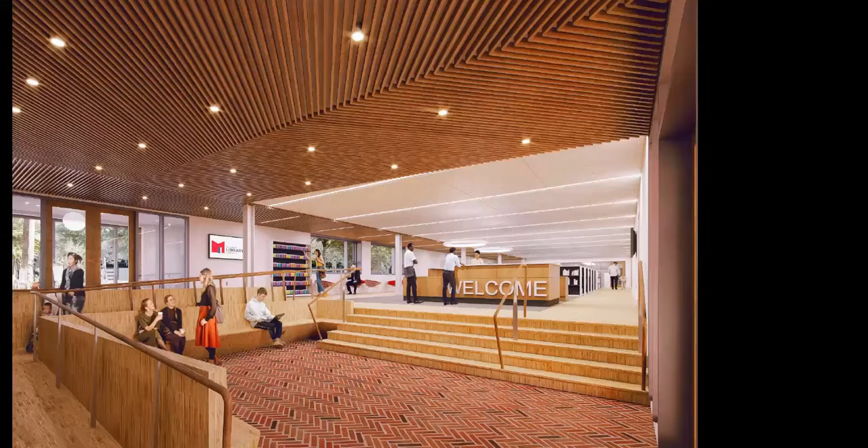So welcome to the library. This is the inner lobby with a view towards the circulation and the staff desk. We're very excited to be here and thank you very much.

As Sarah mentioned, and I won't read the list again, we really could not be here without the help of everybody on this list, from the building committee through Epic Management. We've worked tirelessly with everybody, or they've worked tirelessly with us to make this happen, as well as meeting with all the civic groups throughout this process.

We've learned a lot about Maplewood. People have been extremely generous with their time. One thing not on the list is the focus groups we've done with the teens and the kids, which has been really fun, and some of the seniors. It's been a really enjoyable process and we're anxious to get going into construction.

So to recap a little of what Sarah said, the process started a long time ago in 2010. We joined in 2016 and we've worked with the library and the township through the bond issue and COVID. It's been a long couple of years for all of us.

And we're very excited that we're now in 2022 and we're about to bid the project and open it in 2024. So with that said, a little history.

I just want to remind you, some of you may have seen this slide, some of you may know this by heart. There's the existing library under construction on the right in the green circle. This is obviously a hard hat tour from then. That's the original entrance with the stacks on the left. And there it is again in the top in 1956. But in '69,

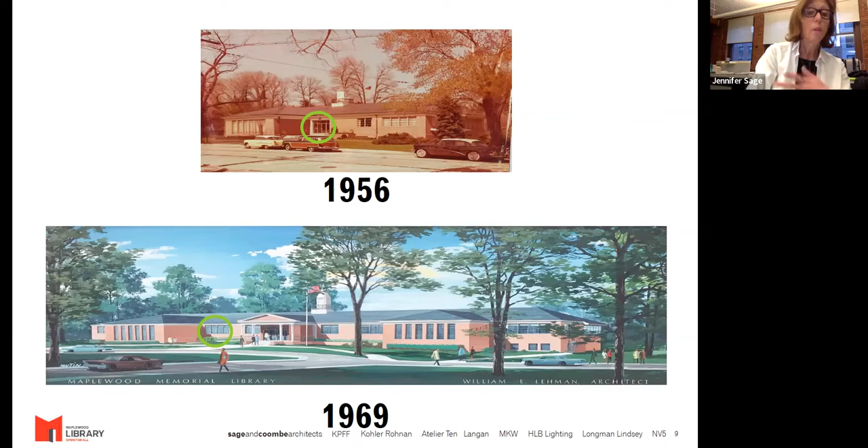Oops. Oh my gosh. Oh, sorry.

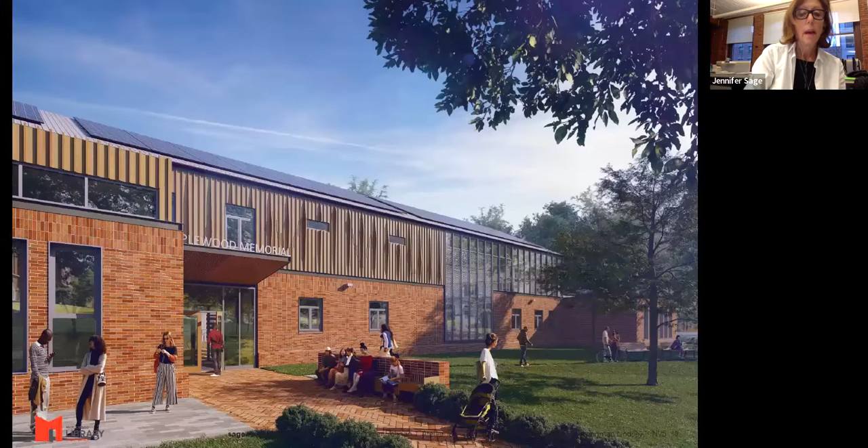And what we've done as part of this effort is to recenter that entrance so that we think that original entrance was in the right place. It allowed you to slip in alongside what is now the community room on the left and have a clear view into the park straight ahead. And we think that's really the public face of this building. It's a big, generous entrance on Baker Street, straddled by the public face of the building, the community room on the left and the stair and children's room on the right.

So the 21st century library, the mission really hasn't changed in what a library is. Apart from public libraries, there aren't many places in a town which are open to all comers, free of charge, with heating and no one at the door to check your identity. Seems particularly relevant right now in this moment.

So what are the elements of a library then and now? Books, librarian, storage, display, reading areas, specialized reading room, circulation desk, card catalog, still sort of, stacks, yes, definitely in Maplewood, technology, even now, community spaces, absolutely in Maplewood.

So why a new library? Well, because it's been a long time since the last work was done. That was 1969, and there's new work to do. The number of card holders in the library has been increasing steadily since 1969. On average, 75 new library cards are issued every month. And more than 20,000 Maplewoodians have library cards, which is a kind of astounding number.

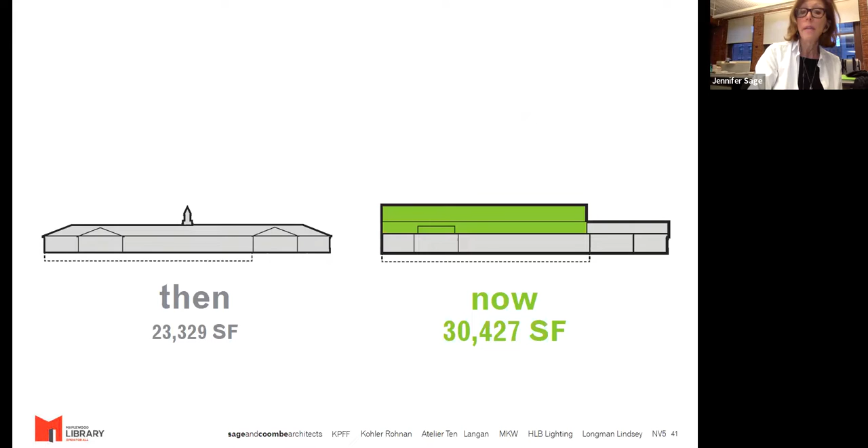So the 21st century library, then and now. It was about 23,000 square feet, and it's now a third larger. The easy way to describe that is by the addition of the second floor.

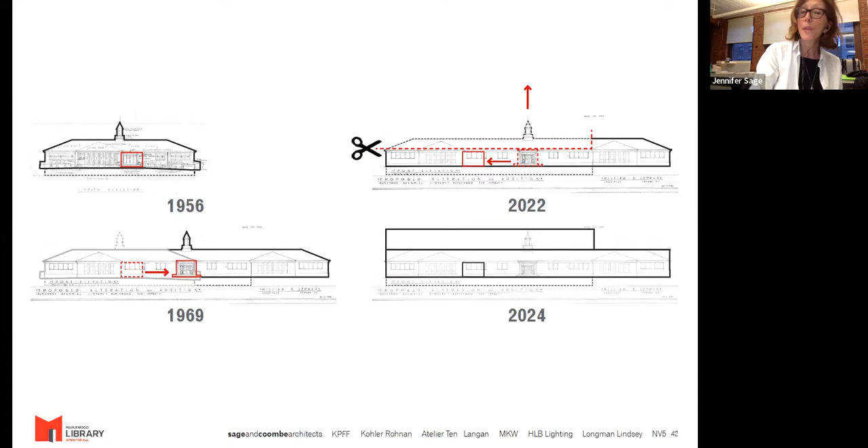So again, there's 1956 with the original entrance. There's 1969 where the entrance slid over to the right and the size of the building was doubled laterally. There's 2022 where it slides back to its original position and we cut the roof off. And there's 2024 with the new second floor, a third more square footage, which is very exciting. And there's the new building.

And I will say that the important thing about this part of the building is that it has two faces. You could liken it to a tale of two cities, but I think of it as a public face and a private face.

One is the face that faces Baker Street, which is where all the smaller spaces are against that street facade. It's the quiet study rooms, the meeting rooms, the offices, the stair, the elevator, the restrooms, all the nuts and bolts of the building that have to be.

But the public parts of the Baker Street facade really are the community room out of the basement, which was formerly the Maplewood room. And that's right on the left where the current stacks are.

The big entrance really brings you not only into the building, but also back out to the park, if that's where your path is taking you, but certainly connects the building to the park. And then the stair, which is over here, you can see it.

This for us is a big piece of the program because we really want people to take the stair. It's part of being a healthy building, and we think that's a feature the current library has never been able to explore. We think it's a big piece, especially as we add this second floor. We don't want people taking the elevator unless they really have to.

On the other side, its other face is the building that faces the park, and for that, it's a much more park-facing building. The new reading room on the second floor is really wide open to the park.

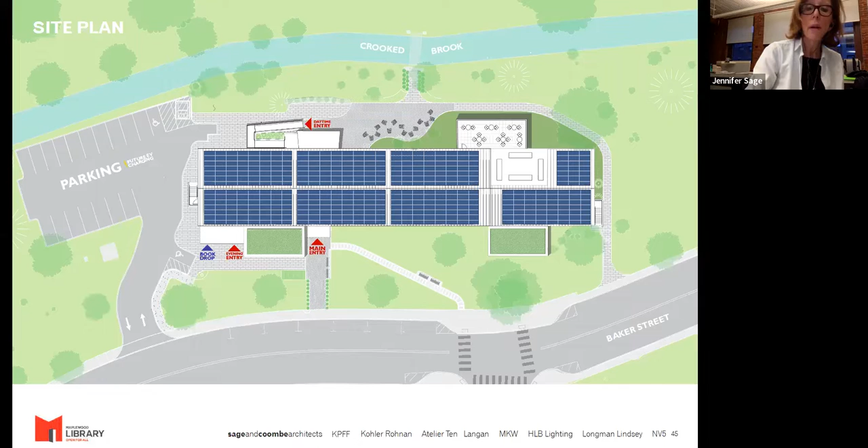The roof, all of these blue rectangles, those are photovoltaic panels, solar cells, which will provide 55% of the energy needed by the library, and we're very excited about that. We'll talk more about that as we get through this.

On the far end, the children's reading zone will stay exactly where it is. The collection management staff office will stay exactly where it is.

What's really new is this new entrance off of Baker Street, flanked by the community room over here on the left and that main circulation desk on the right. This is the stair going up, which we expect everybody to take, and then offices, bathrooms, and an inner vestibule.

That's the space, as I said. The brick of the entry path will carry in, and you can see the park beyond. It's a space where you can take a rest, meet someone. We like the idea that people will say, I'll meet you at the library. Without even having to go up to the desk, you'll see the librarians and be able to ask them questions. Down on the right, you can see the pathway to the children's room below.

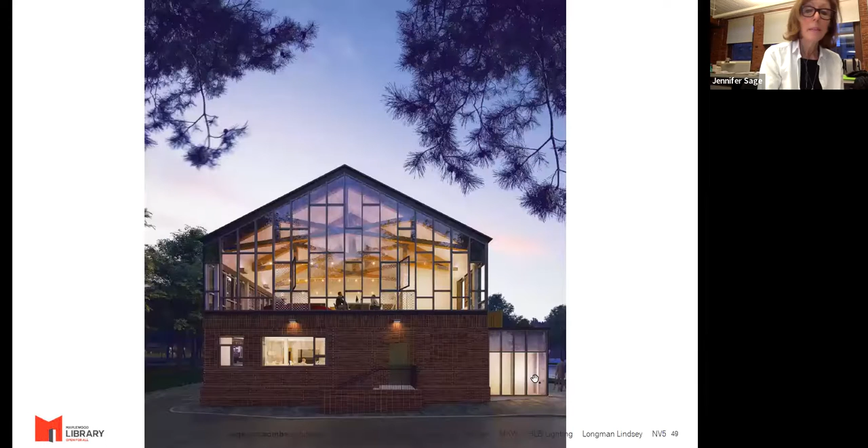This is a view of that teen reading room at dusk. You can see below the vestibule, where people would come in to deposit their books in the book drop. It's also the way out of the community room when it's operating at night. It also has a couple of public bathrooms, so it's a kind of multi-purpose little vestibule down there.

That's the staff workstation, still with easy access to the parking lot. And again, a bit of a view of the park, because we're going to eliminate a lot of the obstructions that have been there before.

Down in the lower level, we have the staff lounge with direct access to their workspace above. We've got the create space, which is a new space for the library. We've got 6 meeting rooms for public access and signing up, some staff offices, a workspace for the friends, and otherwise a lot of storage and mechanical.

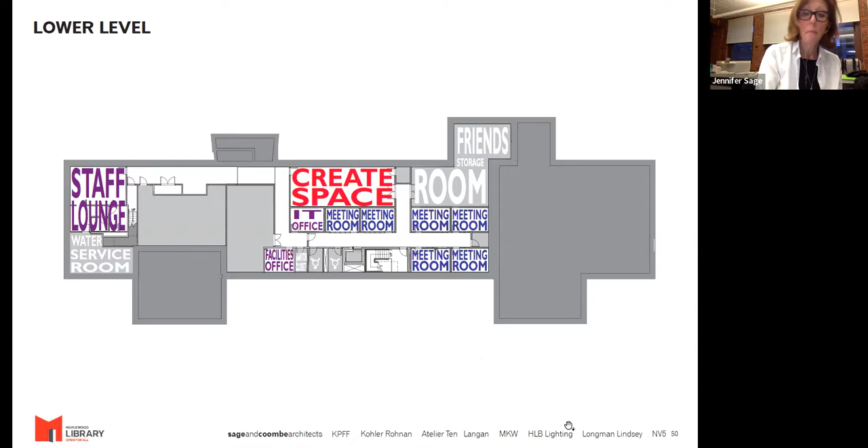We wanted to give you a sense of what's in this new library as opposed to what used to be in the library. So then you had the Maplewood room. Now you have 2 public rooms: one is the forum, and one is the community room on the ground floor. The forum is both a public meeting space and a connecting stair between the first floor and the second floor, so it will be a much more informal space.

You've probably seen them, a lot of libraries are doing them. Colleges are doing them too. It's the way people work now, in a much more informal setting.

The bigger one is the Durand room, and then there are 2 little meeting rooms that you have now. We've got 10 meeting rooms, and that's an amazing thing. That's one of the things we heard from everybody when we met them.

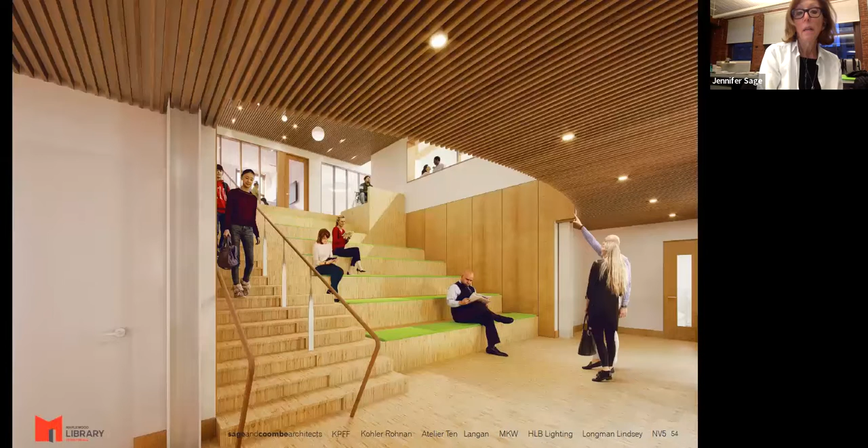That's the lower level of the forum, and you can see one of those meeting rooms at the top of the forum. So the way the forum works is it's really a space where people can bring a laptop, they can borrow a laptop from the library, they can sit with a book, someone might have come to give a small reading.

It's a very flexible space, and we think that people will really flock to it and like working there. You don't have any children's program room right now, and now you'll have one. You didn't have a create space, and now you'll have one. You did have some lounge seats, but we've given you many more and of a much greater variety, from couches to individual seats to seats you can sink into, and lots of seats that you can adjust.

So it really has a huge variety of what this building has for you. Group work tables, you didn't have a lot of those. We've added both for the adults and the teens and the children, group work tables.

That's how everybody's working now, whether you're bringing your own laptop or using a desktop provided by the library. Computer stations, again you had some and you're going to have more, because now there'll be a lending capacity of laptops from the business center, or you can bring your own and plug in.

But there will, of course, be desktops available as well. So, exterior palettes, the exterior material palette - I'm just going to take you through what we have in the building right now. First exterior, then we'll talk about the interior materials.

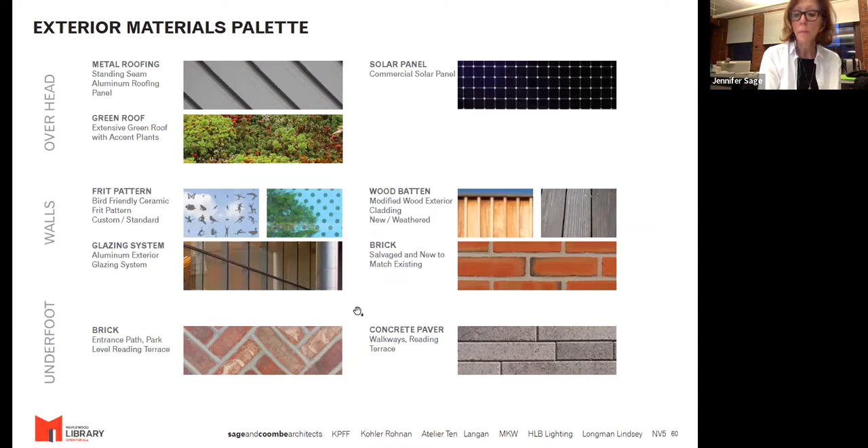And also, as you'll see in a minute, it gives us the opportunity to add some subliminal messaging, which we'll show you in a second.

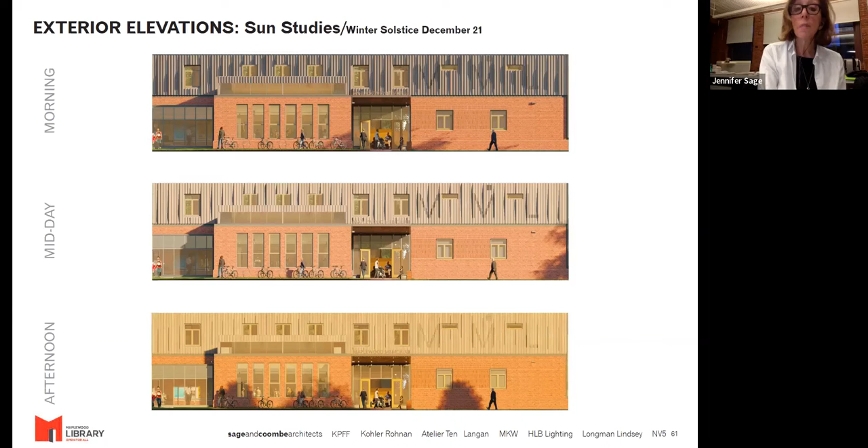So these are just some studies of the Baker Street facade. This is the facade in winter, and you may see in the board and batten that there's one subliminal message of MML - you'll see it here in winter, there it is in spring, a little bit clearer at different times of day, and there it is in summer.

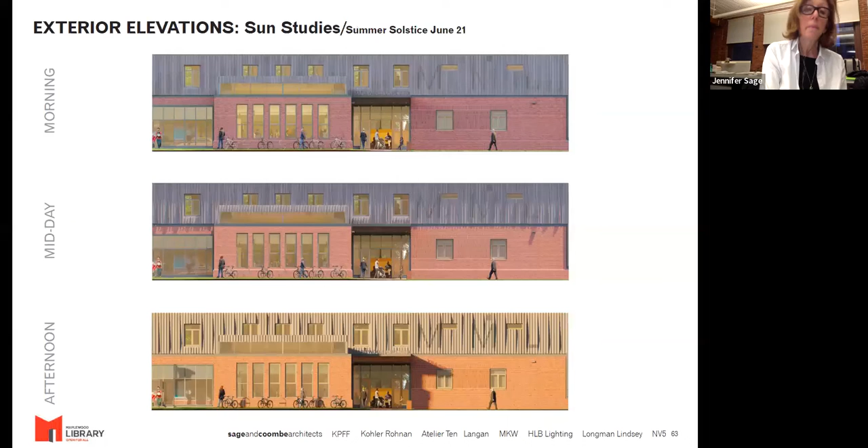And with that - oops, sorry - I'm going to hand this over to Lee to talk a little bit about the lighting.

Sure. So now that we can see the renderings, hi everybody, I'll turn my camera on too. You can see the finishes that Jennifer just described, and I'll talk about the lighting, so we'll kind of bounce off of each other.

I'll start in general: for all the fixtures at the library, both inside and outside, we are using LED sources, light emitting diode. That's really the only source to use anymore these days in commercial projects, so no more fluorescent or metal halide with buzzing ballasts and all sorts of different things going on. LED by far is letting us be really energy efficient.

We are meeting all energy code requirements. The minimum life is 50,000 hours; many of these sources have 100,000 hours. So maintenance at the earliest is 10 years, sometimes 20 years for these fixtures. So maintenance and accessibility has also been kept in mind.

And when we design, we look at layers of light. Now, especially outside, we're being very cautious - all of our fixtures are downward. We are not doing very much.

Everybody who's been there and seen it, we do have some wall fixtures and sconces. We are replacing those and still keeping fixtures close to the building and aimed down. Again, it's good circulation light and keeping light where we need to on the sidewalks.

We will definitely be highlighting that entrance. Most of the poles for the park are staying - those are kind of owned by the city and the park, so we won't be changing any of those.

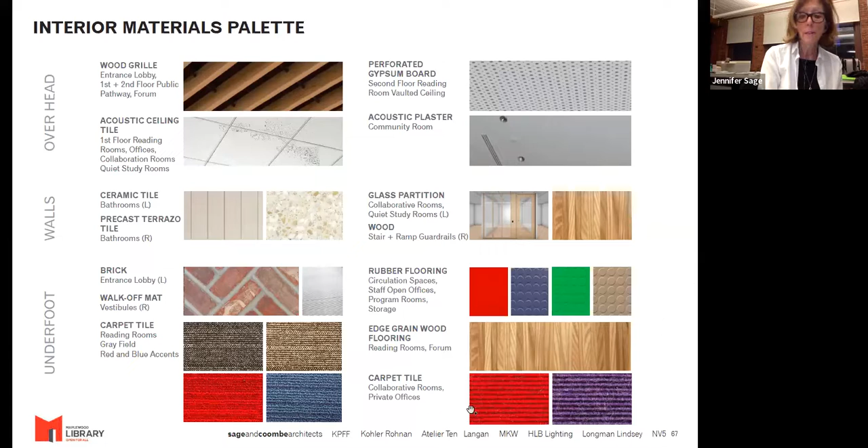We're really excited to emphasize the warmth of the materials palette with our lighting fixtures. Our fixtures are what we'd refer to as architectural - you can see they're flush with the ceilings, they don't come down into the space. They're about layers of light and what we like to call volumetric light - get light on the walls, get light on the ceiling, and make spaces feel bright and tall. We do have some nice ring pendants at the desk to help with wayfinding and identify where something important is happening here.

And quickly I'll mention controls, since I won't mention this on other slides. I mentioned energy code - we do have to have controls for these fixtures, so almost all the fixtures in the library will dim and have that capability. They'll react to available daylight, so they won't be at full brightness when there's plenty of daylight in the space. Interior spaces like offices and restrooms will have occupancy sensors, automatically turning off when there's nobody in the space for a certain amount of time. Outside, we'll have time clocks, so we're making sure not to waste any energy and to be as efficient as possible.

The next few slides I'll walk you through are the more articulated plans that key in some of the materials we've just shown you, and a little bit of the furniture that some of you, certainly the staff, have seen - giving you a sense of the array of spaces. Here it's a little more architectural than the big lettering we showed you earlier.

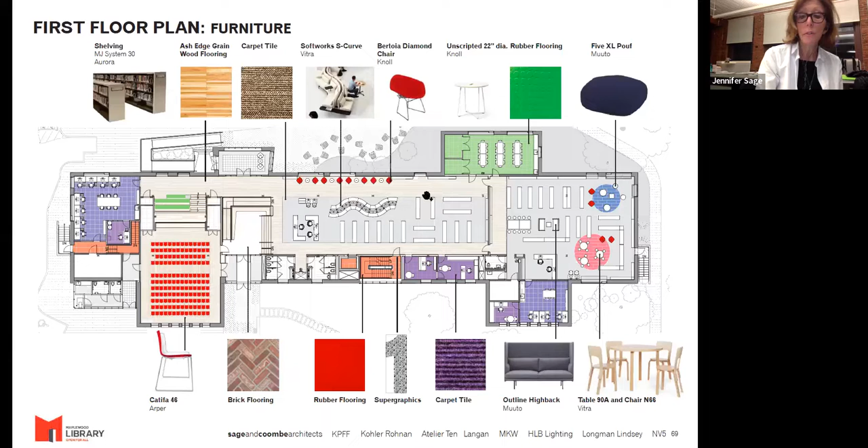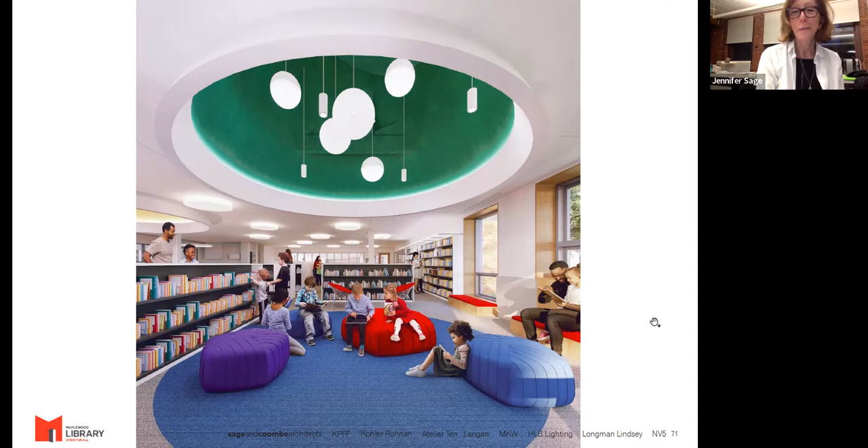This is more specialized in the children's room. In the children's room, we have three different zones: one for the little ones, one for the medium ones, and one for the older ones before they graduate up to the teen level on the second floor. And then on the second floor, there's the teen zone over here.

Along the park, we have a band of chairs. We know that the adults are going to migrate over to the teen space when the teens are not there, so the space is designed as a flexible space that can accommodate anybody.

This is the upper level of the forum, which I imagine the teens will populate when they're there, but I think other events will take place too. These are all the study rooms, meeting rooms, archive, teen office, the stair on the Maplewood, Baker Street facade, and this is the adult reading room with the adult terrace over here, with the same simplicity of palette.

The meeting rooms will have chairs on wheels. The work tables out in the public will have chairs on what are called sleds, which are easy to pull in and out, but will not be on wheels. The tables will have power, in some cases desktops provided by the library, and there'll be lots of comfortable seating.

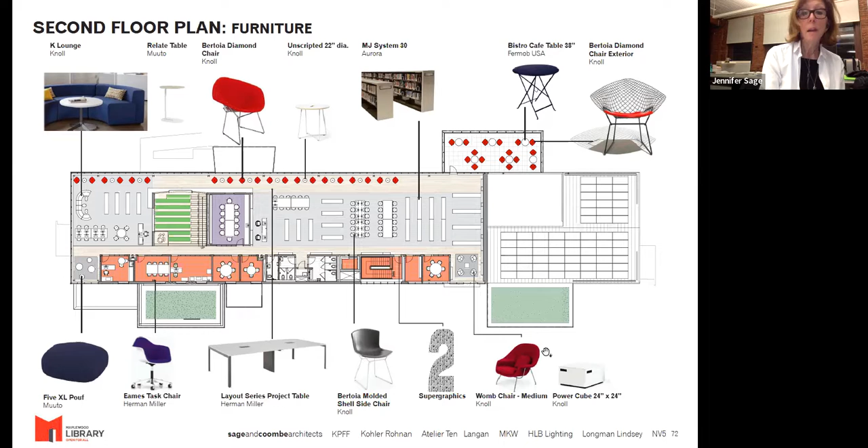One more handoff to Lee to talk about the second floor reading room and the view of the park. We're so excited about this beautiful space. I'm sure everyone is just as excited as I am to experience this, our raised roof, and the beautiful wood trusses. So we have uplights, which blend in.

They're white uplights. You can see them on the perimeter on both the left and right side. That will uplight our roof, creating a nice general layer of light to bounce back into the space. Then we have more accent light with track fixtures to make sure we have enough light, plenty of light to read and to stay there all day, really taking advantage of these ceiling heights.

Thanks, Lee. And finally, the lower level with the staff workspace with direct access to the staff lounge and the workspace above. We've got six meeting rooms, the create space, other offices, bathrooms, and the elevator and stair below.

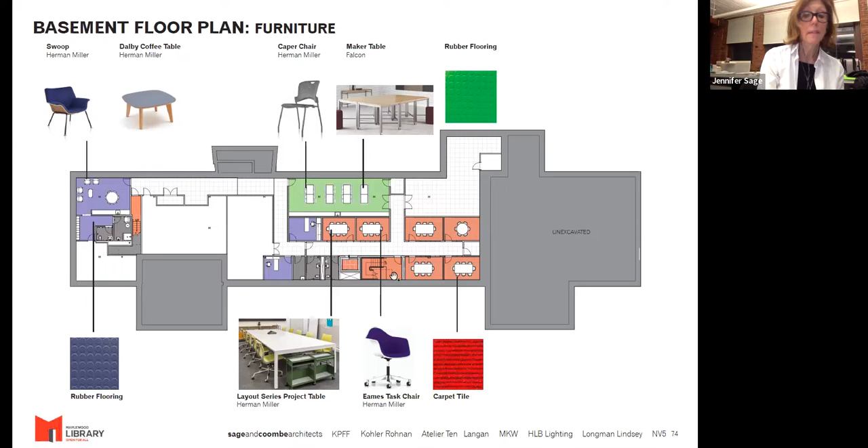So we do need to talk to you about sustainability as well. We know it's important to the town of Maplewood. We're going for LEED Gold. We think we should have no problem meeting it, and if we can get higher, we definitely will. This is our scorecard, and we can certainly revisit that, although it's too much to walk through right now, but we're happy to talk about it with anybody, and we've got plenty of knowledgeable people on the call.

We want to summarize the essence of what the sustainability effort has focused on. The building will use no fossil fuels. It's an all-electric building with a photovoltaic array, i.e. solar panels. That's an enormous achievement, very forward thinking, and Maplewood is out ahead of the pack on that one, where the photovoltaics will provide 55% of the energy usage of the building.

We're also going to meet the American Institute of Architects 2030 Challenge, which sets some very high goals for sustainability. In every respect, we've maximized energy efficiency from the envelope to the systems, from the lighting that you heard Lee talk about, to the way it will be tested before opening.

We've got 30% reduced indoor water usage. We've got lots of user comfort, from shading to indoor air quality. We've got operable windows, and of course we've got bird protection because we do not want the birds to fly into the wall.

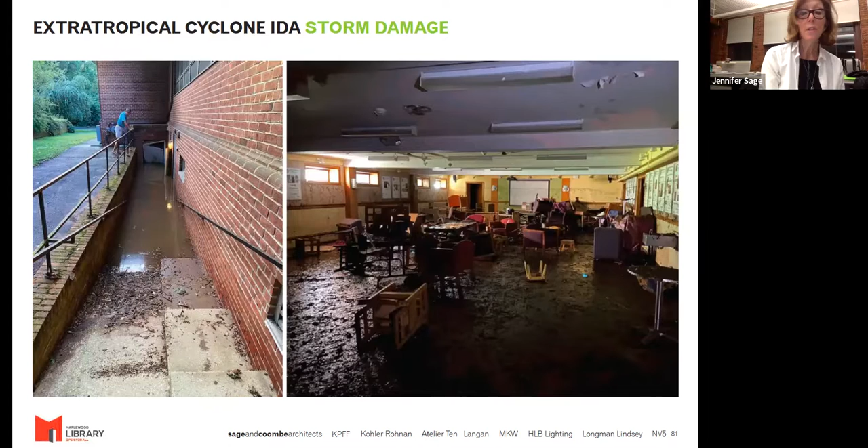Then there's the subject of resilience, a focus for all of us, especially after extratropical cyclone Ida, which we all lived through, and especially Maplewood. If you haven't seen these images, this is the library—it took in about 5 feet of water. It was pretty horrific, though I suppose you could say it took care of some of our demolition needs. Thank heavens it happened when it did, in a sense.

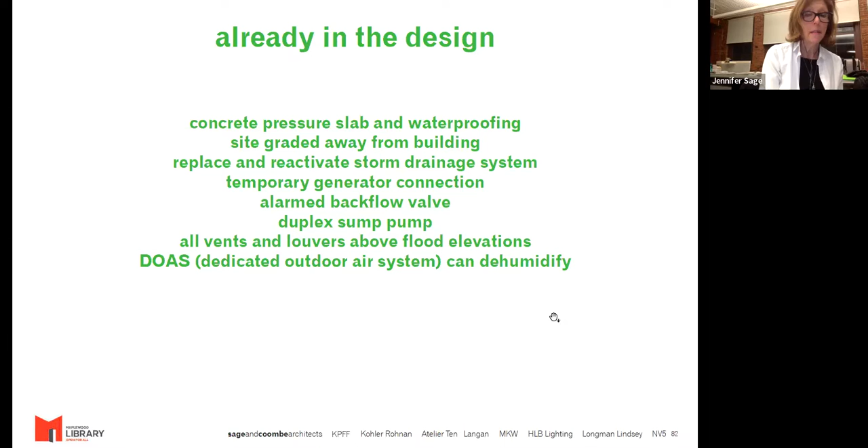So we already had a lot of features in the design to protect against resilience: a concrete pressure slab and new waterproofing, the site graded away from the building, replaced and reactivated storm drainage systems, and a number of other things including a temporary generator connection and sump pumps—all the things you would expect when designing with belts and suspenders.

But after Ida, we met with the township and everybody immediately said we have to take this more seriously. We're not designing to code, we're designing way past code. So we really had to move beyond what we all thought was sufficient and do something much bigger. We took all the systems that were currently designed for the lower level and moved them above the first floor. It took an enormous effort, and what's amazing is that we actually gained program space.

Everything got twisted—we took things around, everybody kind of pushed and pulled at this. We ended up in the end with 2 extra collaborative rooms, 8 more create space workstations, and a large staff lounge. So Ida did us a little bit of good in that sense.

And then with that, I will pass you to Al and Ted from MKW—I'm not sure who's speaking first—to talk about the landscape scheme, and then we'll come back and finish up right after that. Okay, thank you, Jennifer.

And I'll rely on you to advance the slides. We don't have too many to go through. I'm speaking and Ted is just going to answer any questions or things I don't recall, that sort of a thing. What an incredible building, really, really great—really happy as the landscape architects for the project. I've been working on it.

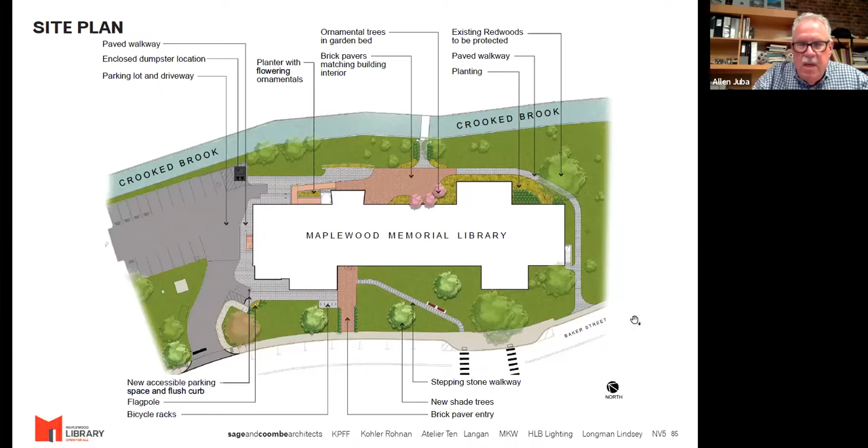We have a building that was built in the 1950s, and it was built for that time, and it worked for a number of years and was very well used and well loved, and now it's really worn out. As we move into the future, we really need a building that's flexible, adaptable, technologically advanced, with all the sustainable features that we really need to have going well into the 21st century.

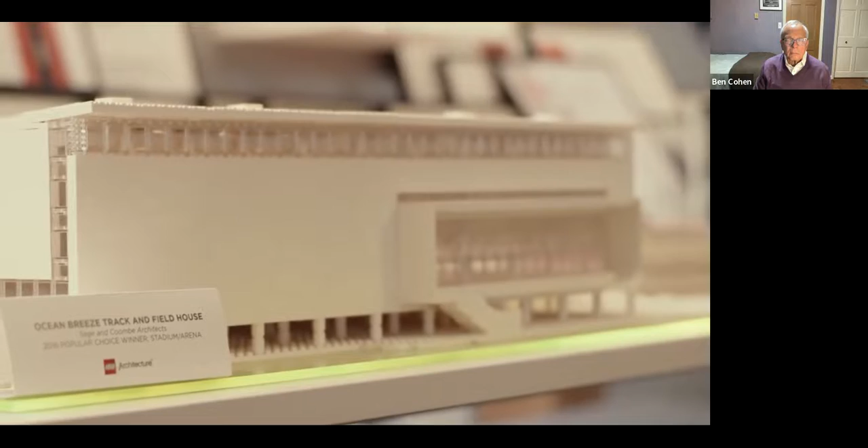My name is Jennifer Sage. I am one of the principals and partners of Sage and Coombe Architects.

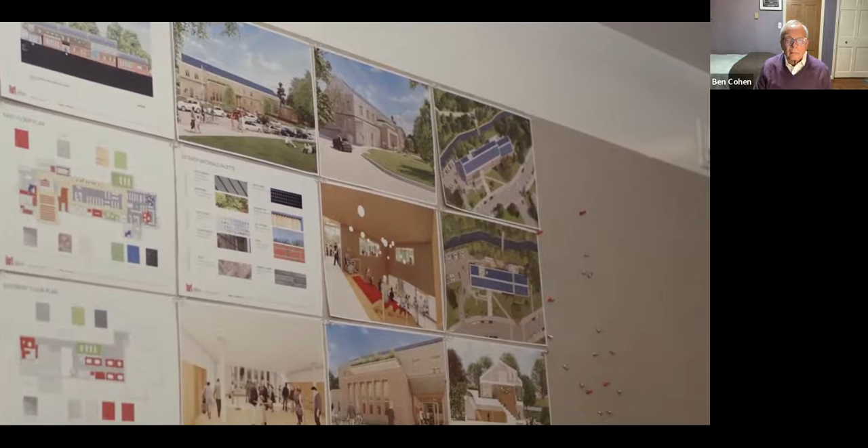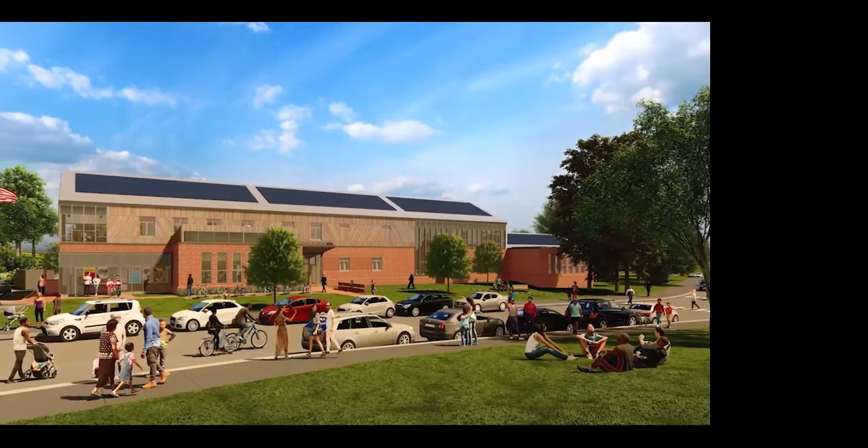Libraries are really vital institutions in the world right now, and the fact that the library is so beloved to the town of Maplewood is one of the big reasons that we want to make a great building. We actually thought that the original design of the library was very clever. When it was enlarged in '69, a lot of that charm was lost, and so we wanted to bring back the connection that the library has to the park and really open the building.

It's an inspiring place. It's a place you would want to come to meet your colleagues and meet new friends, a place to come and read and to think. Contemplative space, but it's also a collaborative space. It's really going to be a place that people go to, for events and meetings and work and books too.

I think when we started talking about this, people said, we're not going to be looking at books anymore, reading books, but yeah, we are, and we're still reading books, but we're doing so much more, and the library is the place for that. Now it's a destination. It's a place to be at, to learn, to have fun, to be with others, and to socialize, and that's what's important.

There are about 20,000 card-carrying library members in Maplewood, and about 1,000 people use the Maplewood Memorial Library every day. It's really important that Maplewood, that's such a vibrant community filled with such interesting people, has a really special place for everybody to meet.

The building we have, there's a building and then there's a sense of library. The building itself is failing. When it was redone in the 60s, it was done to the very best that it could be, but times have changed. It's been a good 60 years.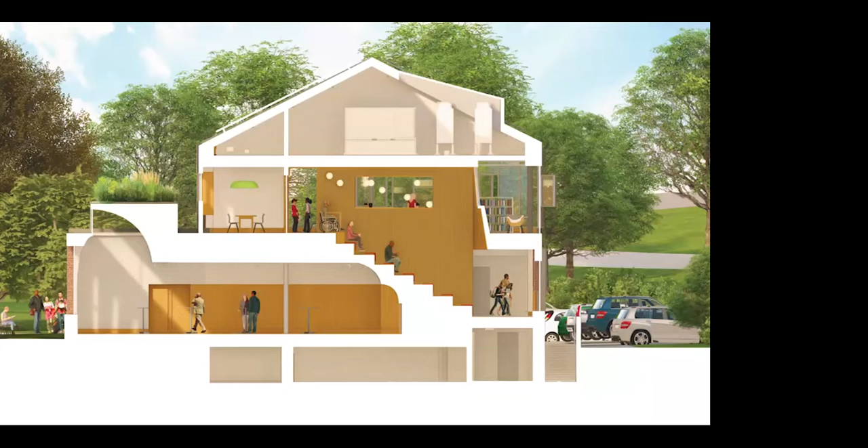So this only works if we have a partnership. The Township Committee has put up $12 million. The state is coming through with the largest grant we've ever received in the history of Maplewood with $8 million. And we still need a little bit more. This is why we're asking individuals, families, businesses, foundations, anyone to help join with us in building a library for the 21st century. We need to put this together.

We need everyone to feel that they have a sense of ownership of this building. By making that contribution, you will be making an investment not only in the immediate future, but in the next 50, 60 years.

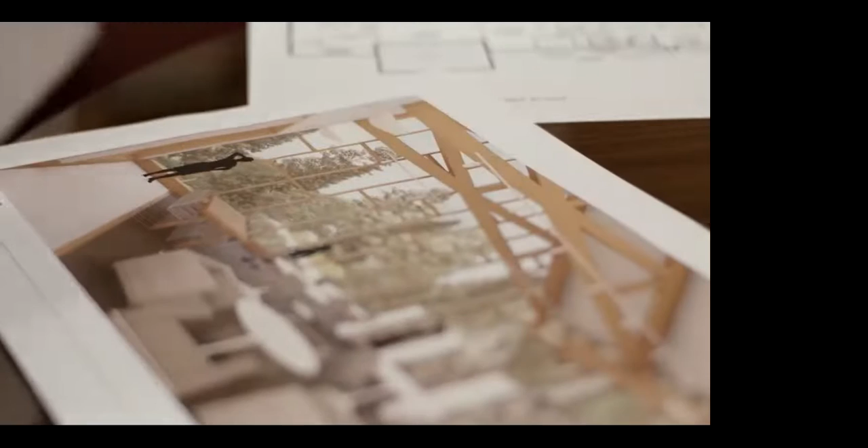I'm incredibly proud to live in a community that is so supportive of our library and sees the need for it. We're now at the point where it's actually happening. It's really taken everybody in Maplewood to make this possible, and I really can't thank the community enough.